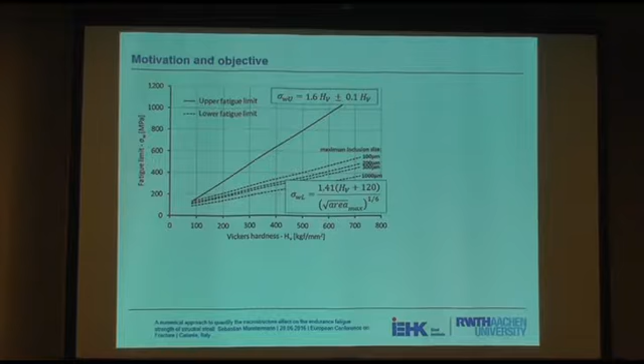There are some very famous rules that serve to express microstructural influences on the endurance fatigue strength of steel. The most famous one, to my understanding, was given by Murakami. He mentioned that the major microstructural influence on the endurance fatigue strength of steel is given by the maximum inclusion size. So it's not of a very significant influence how many inclusions you have, but the major contribution comes from the size of the biggest inclusion you have got in your microstructure.

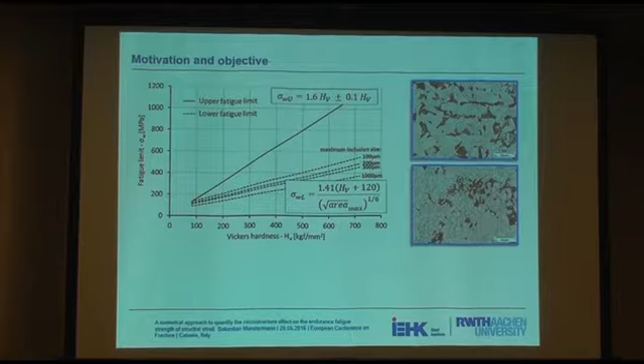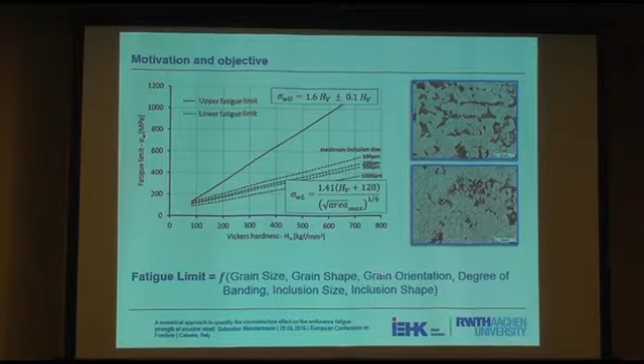In other words, according to these findings, it does not play an important role if the microstructure looks like this or if the microstructure looks like this. But both these images were made for steels of the same grade. Both of them are steels with a guaranteed yield strength of 355 megapascal. The question I would like to answer with my presentation is if we can express the fatigue limit of steel as a function of microstructural parameters like grain size, grain shape, grain orientation, degree of banding, and so on.

Okay, to understand how we can express this, we also need to understand the fatigue mechanisms of steel, especially in the early fatigue stages. So you can here see an illustration which shall be the total lifetime of a component under cyclic loads. And you see that we've got a crack incubation phase. This is a phase on very, very small length scales. The first cracks are formed. Usually that can happen at inclusions.

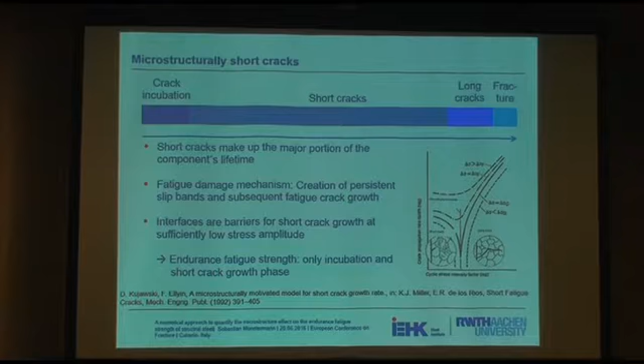Then we will have a very long period where mainly short cracks are growing due to the cyclic loads. And of course, this somehow depends also on the applied stress level. There is a somewhat shorter period where we've got the long crack growth, and finally a very short term, which is the final fracture. In fact, this is almost zero of the lifetime, but then you wouldn't be able to read the word fracture. So I reserved some significant space for this. So what we understand is that short cracks make up the major portion of the component's lifetime.

And the fatigue damage mechanism in this phase for the short cracks is the creation of persistent slip bands, which govern mainly the incubation phase and also the short crack phase, and then the subsequent fatigue crack growth. And for short cracks and long cracks, there's a certain transition in crack growth mechanism. What's very important, especially for steels, is that interfaces are barriers for short cracks, at least if the applied stress amplitude is not sufficiently high.

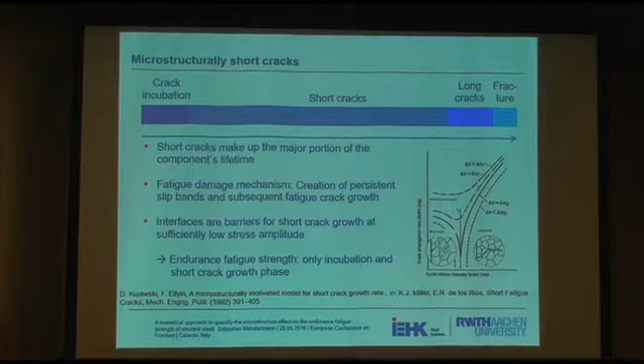So it means that a short crack can grow, but if the stress amplitude is not sufficiently high, for a longer period of time and for a significant number of cycles, it will not be able to pass this barrier and run into the neighbor grains. And for the endurance fatigue strength, we observe that the incubation phase and the short crack growth phase are completely run through, but there is no transition to long crack growth. In other words, if you load a sample in the region of the endurance fatigue strength, you will see a lot of cracks inside, but they are very, very short.

They are not long cracks, they are short cracks that simply stop at these boundaries unless you provide a very, very high cycle number, or in case that you increase the applied stress amplitude.

I would like to mention the general approach that we have used here. We have performed a systematic parametric study on artificial microstructure models in order to identify these microstructural influences on the endurance fatigue strength. We have investigated 81 different microstructural configurations, which were tested on 9 different stress amplitudes. For every configuration, 20 statistically representative volume elements, or microstructure models is the better word, were used.

The topics I would like to address today are, first of all, how can we create the statistically representative microstructure models, how to quantify the fatigue relevant loads, and how to numerically predict the endurance fatigue strength. So let's speak about the algorithm to create statistically representative microstructure models.

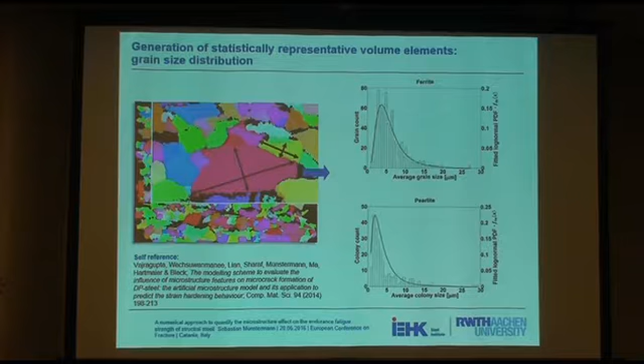Here you see an EBSD image of a typical steel of the grade S355. You can expect that the microstructure is made up by ferrite and by pearlite. The colors here indicate the crystallographic orientations of the ferritic phase. You can first of all measure the phase fractions for ferrite and pearlite, and then individually you can also measure the grain size distribution of the ferritic phase and of the pearlitic phase, and you can also find suitable distribution functions to express these findings.

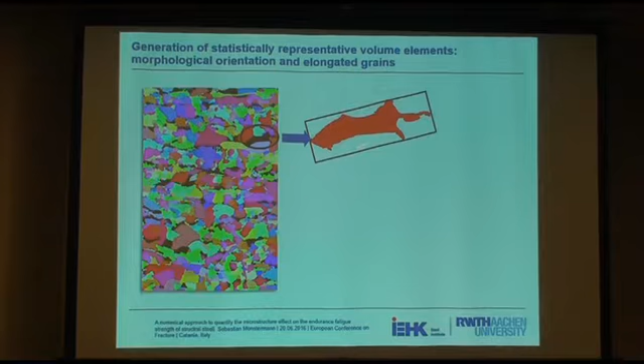Of course, what's also important are some morphological parameters of the microstructure, for example, the elongation of grains, the morphological orientation with respect to the rolling direction. This can also be measured by the same approach, and then you can run the so-called random sequential addition algorithm. This is an algorithm that puts the seeds for the later grains into the predefined box.

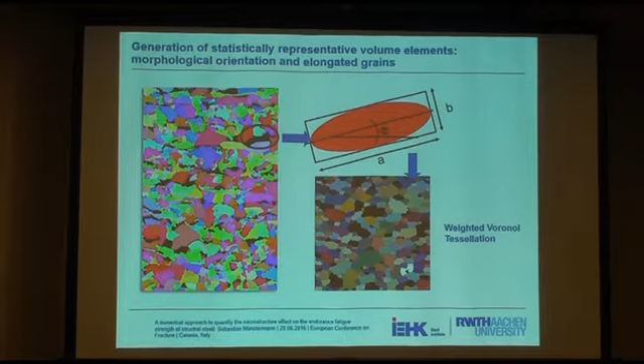And of course there are some laws: you have to reserve a certain space where no other seeds may be placed. Once you have put your seeds into the box, they should not be moved anymore, and there may be no intersections of these boundaries that we've reserved for the grains. And then you run the multiplicatively weighted Voronoi tessellation algorithm and you create such a microstructure model.

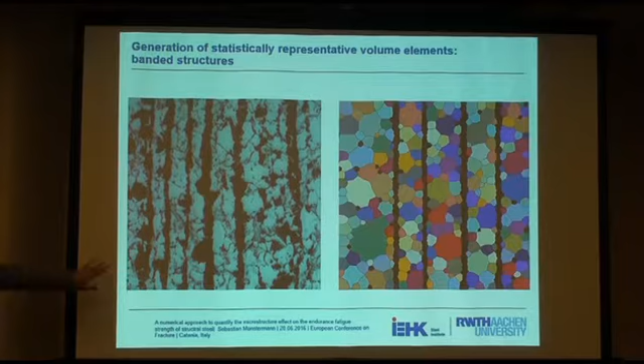Just to mention, we are also able to consider these elongations of these banded kinds of microstructures, which are quite often present in pearlitic steels. And for fatigue investigations, this is really important: we also need to consider the inclusions. The inclusions are addressed on the one hand by their average diameter and on the other hand by their shape, as a shape factor.

The shape factor can vary between 0 and 1. If it is 1, then the inclusion has got a circular shape, whereas a significantly smaller number than 1 means that there's a very polygonal shape of this inclusion. Also here, as you will later see, we vary both the inclusion diameter and the inclusion shape.

Okay, now we've got our microstructure models and we need to describe the constitutive behavior of the individual phases. We've observed in some experimental investigations that the pearlitic phase was not that important because we saw that the incubation happens in the ferritic phase. Therefore, we cared for this quite a lot and we have used a crystal plasticity model to express the hardening behavior of the ferritic phase.

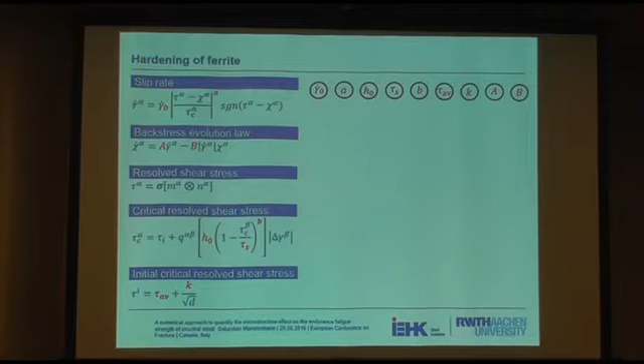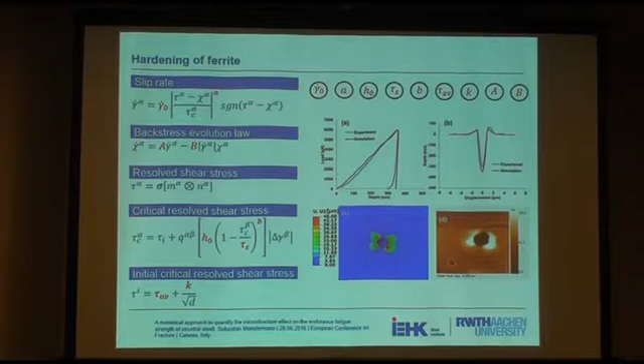It's a phenomenological model that does not consider strain gradients, but at least it considers the kinematic hardening. So it's a combined kinematic isotropic hardening model that we have used. For the isotropic part, we have performed nano-indentation tests in order to fit these phenomenological parameters. The target functions were the load indentation depth curve, and also the pile-ups that were created during the indentation. And likewise, you could find the set of parameters.

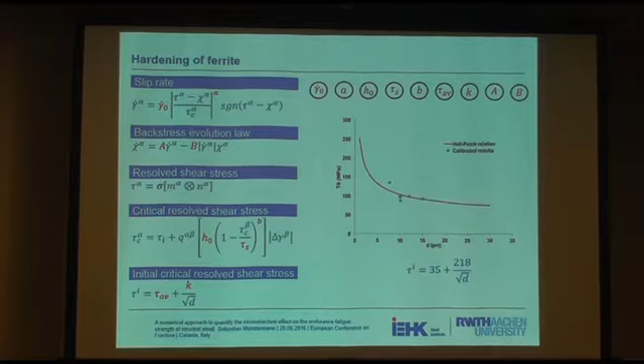It's to be noted that we also tried to consider some Hall-Petch relationship in this model. So in fact, we indented grains of significantly different diameter in order to find a Hall-Petch relation for this crystal plasticity model.

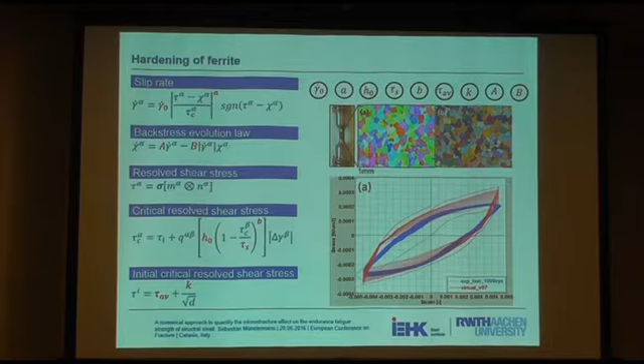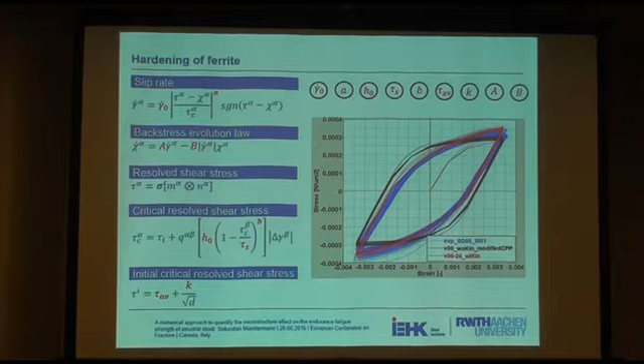Here you can then see some experimental results that were achieved in stress-strain experiments. You see how we calibrated the kinematic hardening parameters, and here you see in red the contribution of both kinematic and isotropic hardening. You see good agreement to the experimental results, so we believe that this is expressing the reality quite well.

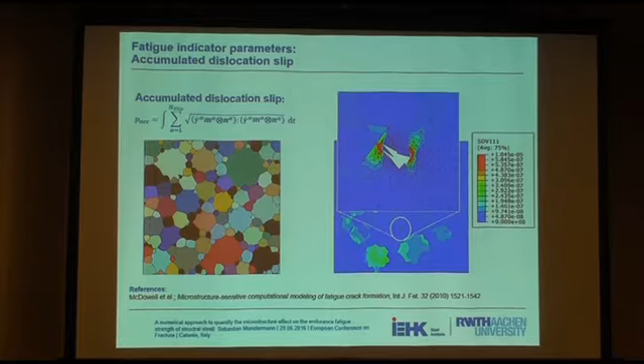And then we had to think about how to quantify the relevant loads. Of course, this is done with fatigue indicator parameters, and as this early stage of fatigue damage is very much related to the slip irreversibility, we believe that the accumulation of dislocation slip is a suitable fatigue indicator parameter for this early phase of fatigue damage. Of course, there are also other fatigue indicator parameters, a very famous one by Fatemi and Socie. And in fact, we tried to combine them and resolve them on the individual slip systems.

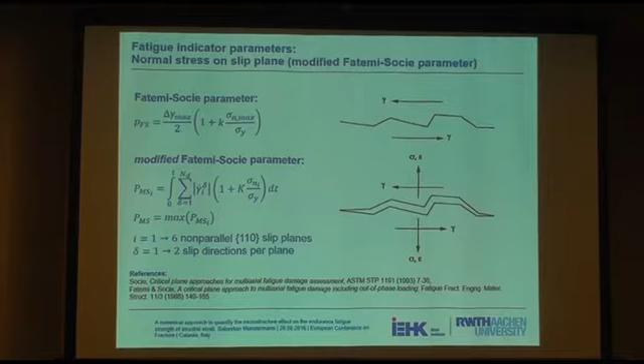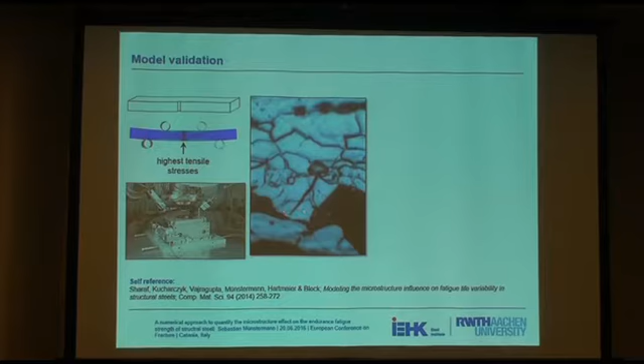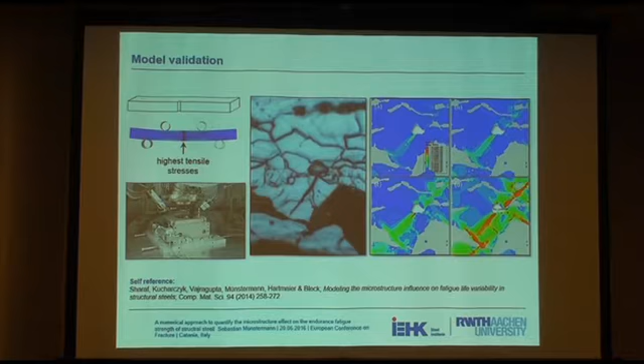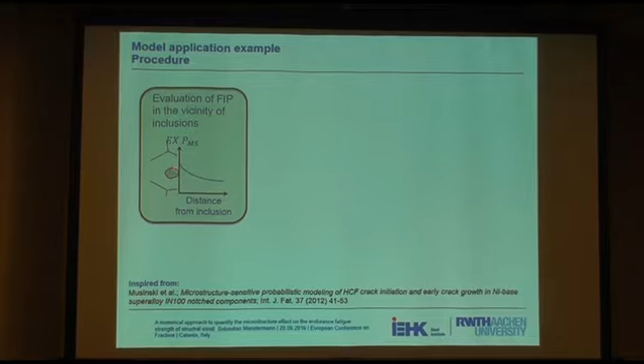constituent of the microstructure. And here you see our simulations evaluated at different cycle numbers, and you can really see that our fatigue indicator parameter also kind of predicts the crack growth direction quite well. Okay, so we can express the fatigue indicator parameter in the zone very close to the inclusion.

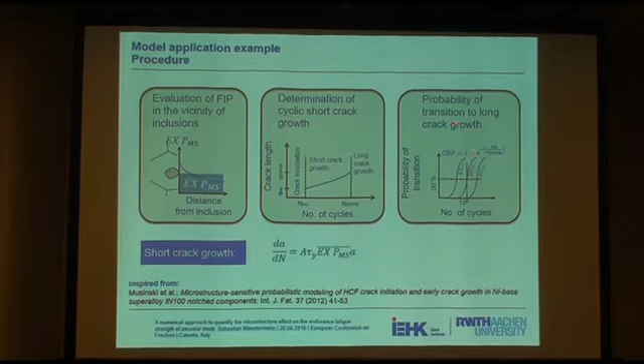There is also a certain crack propagation law available for these short cracks, a kind of da/dN rule, similar to the Paris law. And of course, with increasing length of this short crack, it becomes more probable that the crack will have a transition to a long crack. So also here we have to use a statistical description. We believe that the crack at the end of the incubation phase will have a length which is more or less the diameter of the ferritic phase.

There's a certain number of cycles in the incubation phase which mainly depends on the fatigue indicator parameter in the vicinity of the inclusions. And we also believe that once the short crack has reached 3 times the ferritic grain diameter, it should become a long crack, at least with a probability of 50%. So here we could also calibrate this cumulative distribution function law.

And then we could apply different stress levels and express the influence of stress amplitude on the number of cycles at the end of the short crack period. And also we know that roughly at 5 million cycles there will be these barriers that become active. So here we cannot trust our simulation result anymore, and we should really run into the endurance fatigue strength.

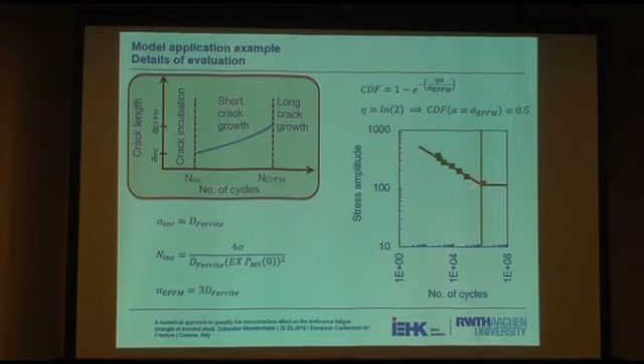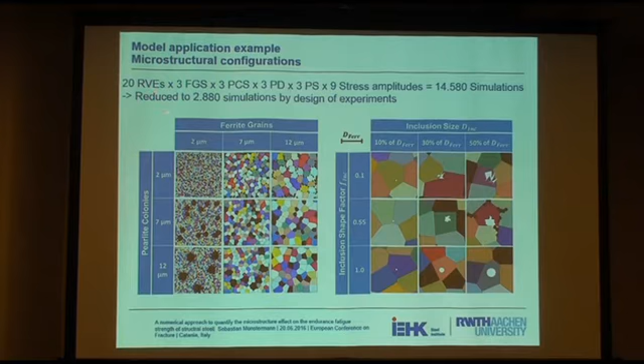We have tested almost 14,580 configurations for our microstructure models, because we varied 3 ferrite grain sizes, 3 pearlite colony sizes, together with also 9 configurations of the inclusions of the particles. We made, as I mentioned, 20 RVEs per configuration on 9 stress levels. In fact, we then used design of experiments to reduce the number of simulations to be performed. And here's what turns out.

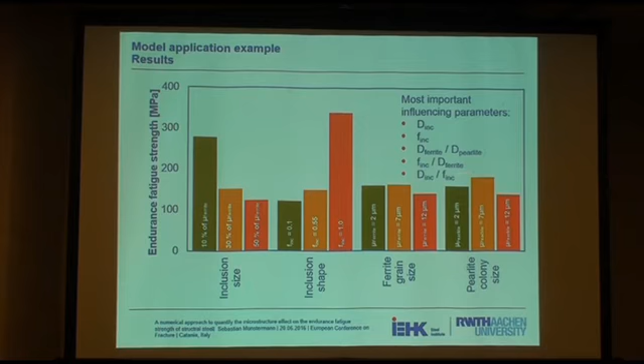You can see, and this is not a surprise, that the inclusion size plays a very important role. Also the inclusion shape plays a very important role, but you can also see that there are some minor contributions coming from other microstructure parameters. The most important ones are listed in here, so it's mainly also the relationship between the ferritic and the pearlitic grain size.

To sum up, I've presented a method to quantify the microstructural effects on the fatigue limits. This one is based on simulations with artificial microstructure models. They were done in 2D with plane strain assumption. I've been speaking about the CPFEM approach that we used. I've also mentioned that 2 fatigue indicator parameters were used, and I could reveal some more or less important microstructural influence on the fatigue strength of this material.